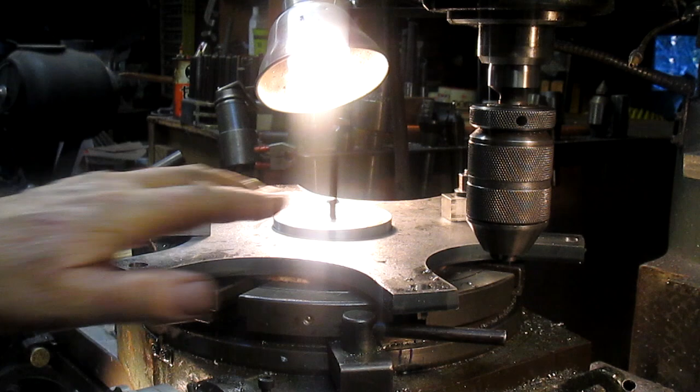Okay, the next set of holes are two holes here and here, and threaded 12-24.

Okay, so what we have here is we're going every 60 degrees, and I've already marked my 60 degree point, and that is this little white dot right there. You can kind of see it. So we're going 3 degrees either side of that dot, there's 1, 2, 3. Now what we're going to do is come back to the other side of the dot, 1, 2, 3. And then we take the dial here, and you can kind of just see it, and bring it up to 1 minute, and then lock it in place, and it's ready to rip.

Let's swing up. There you go.

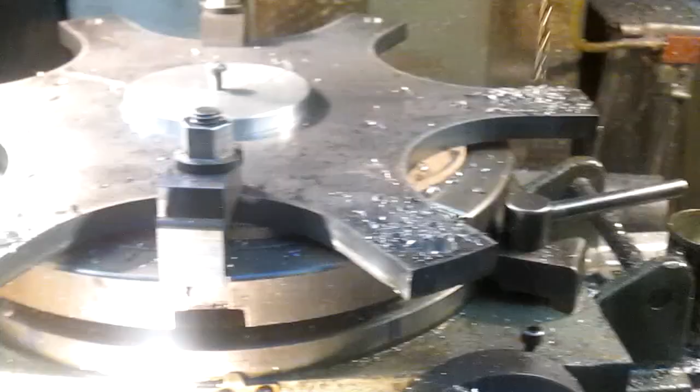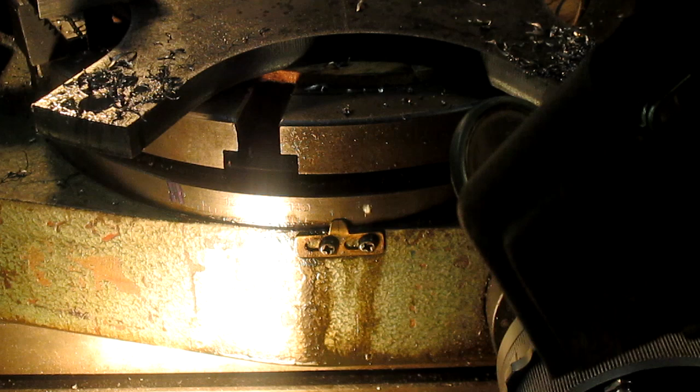All right, we're going to rotate around to the next 60 degree point. And there it is coming up. And we're going to do 3 degrees. There's 4, there's 3. And then we bring our number up to a minute.

All right, so we've done our 360 degrees, and we need to take our drill bit out, and this whole thing needs to be tapped. And we're looking at a 1224, I believe. 1224.

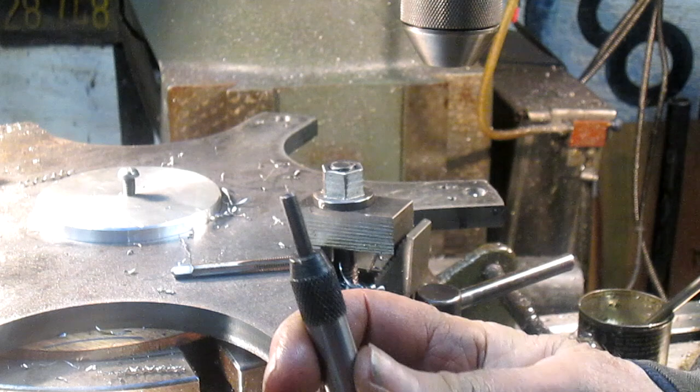So first thing we do is put our tap follower in. And this is, I just learned this just a couple of days ago. I've had this tap follower for probably 15 years, and I never even considered that you could take it apart. Oh yeah, you take the screw out of the back, and this thing flips around and it has a negative in it for these kinds of taps. And you've seen these taps before. They always frustrated the hell out of me. But then I realized, hey, it fits and it works.

So to put our tap follower in, come on. There we go. Tighten that up.

And we need to take this down. Maybe about that far. Okay, a little further. Just a tad more. There we go. And get our wrench.

Now the key is, the most important part is that these taps go down evenly and centered. And so we take the extra time because I don't want it screwing up. And we're just taking it down about halfway because I'm going to come in with a drill and this tap and speed drill the rest of the way.

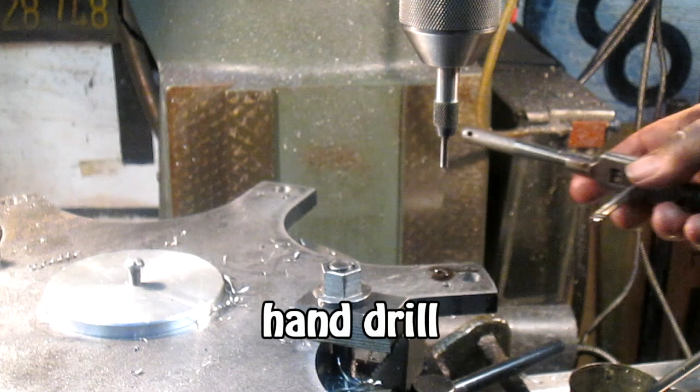So let's back up a little bit. Somewhere in that general area. Where are we at? 4, 3.

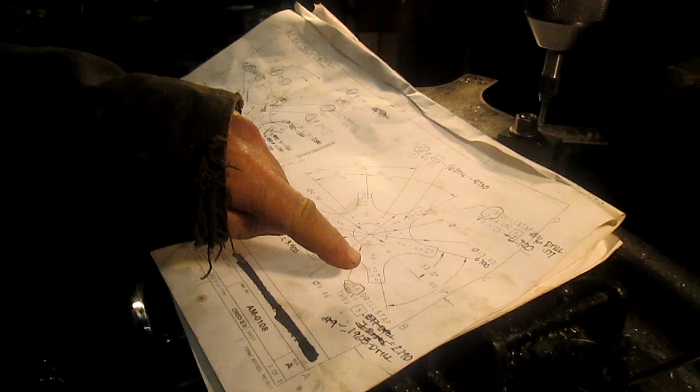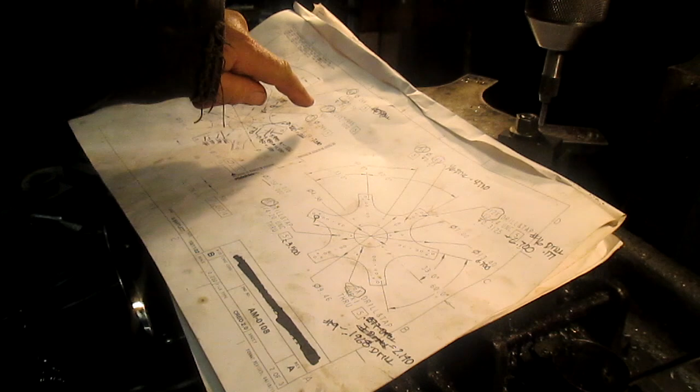Okay, on to the next hole, which is, there's 4 of them in here in line, actually 5 with the little 16th inch hole, but we won't do that right now. We're just going to do these 4, and 2 of them are drilled at 266 plus or minus, and 2 of them are drilled at 250 minus 0 plus 5.

So we've got a bit of leeway. I'm gonna, on the 250, come in with a reamer and just ream the hole, and that way we know we're exactly 250.

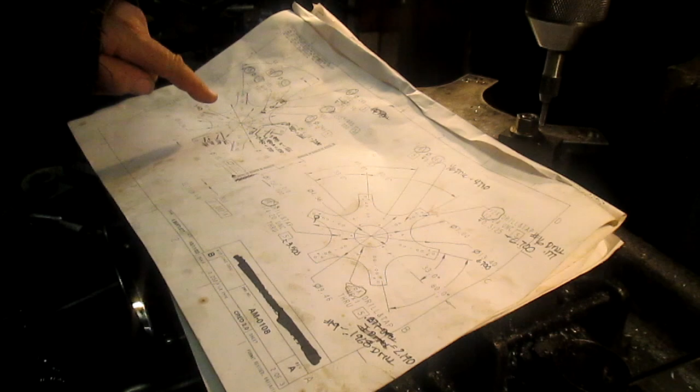So our other size is, where's it at? Oh, here we are. And I marked, when I did the first one, I just came in and wrote down all of the dimensions, so I don't have to mess with that. So our first dimension is 5995 at 266.

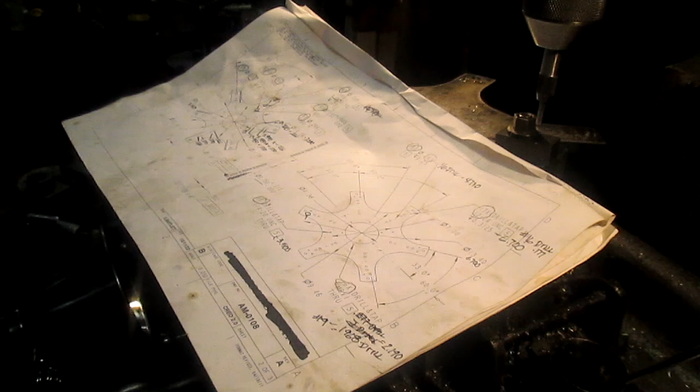5995. Let's go ahead and get that going. 599. Five.

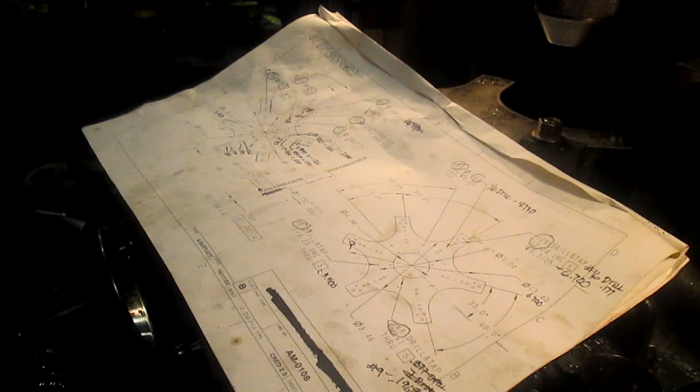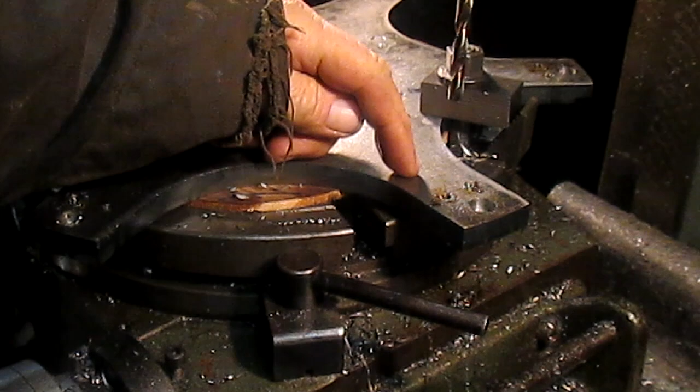Let's bring in a little closer. Now, we are sitting 33 degrees off, so we want to come back to that center line, which is right here, I believe. Snug things down. And I think we're ready to rip.

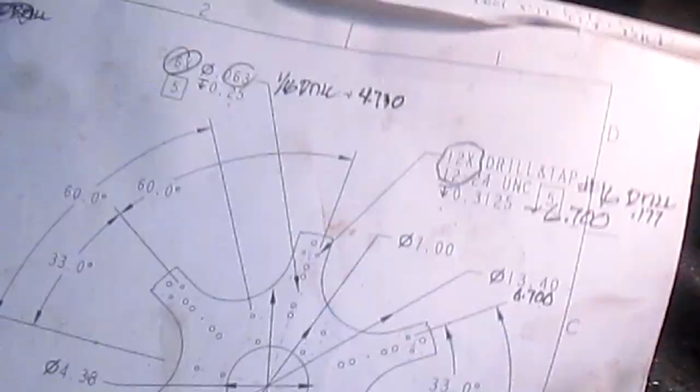Okay, that's that for that. Now what we're going to do is go all the way to the bottom, because that hole is also a 266. And let's figure out what the measurement is. On the bottom measurement is 266 and 3465. So we're going to go to 3465.

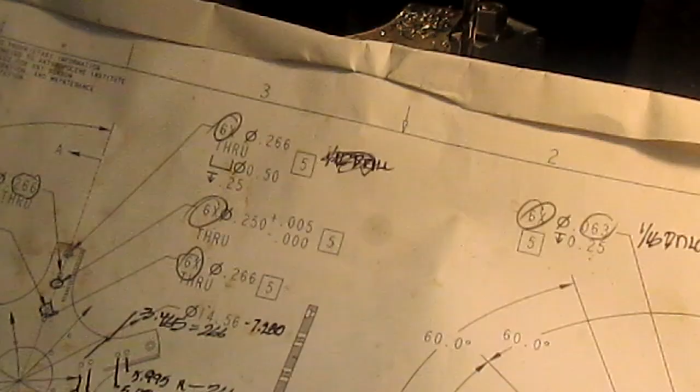And check it one more time. Our bottom hole, 3465 at 266. Let's do it again.

Okay, we got those two holes drilled. Now we need to drill the two center holes, which are going to be reamed. So we're going to go a few thousandths under 250.

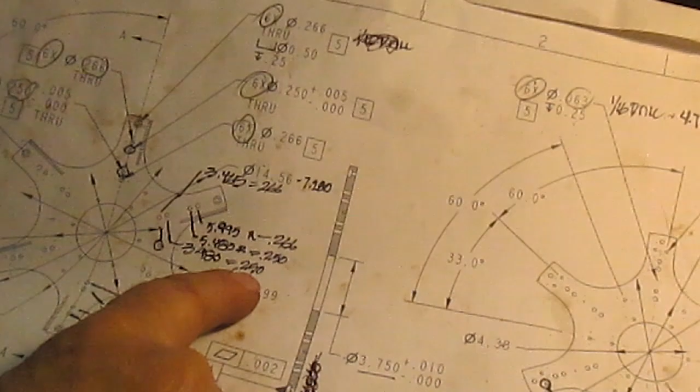Okay. And our diameter, we look at it. The two center holes are 250 and 250, so we'll go to the 3980. 3980.

All right, well our next measurement is 5480 at 250. So same deal. Okay, this is the fun one.

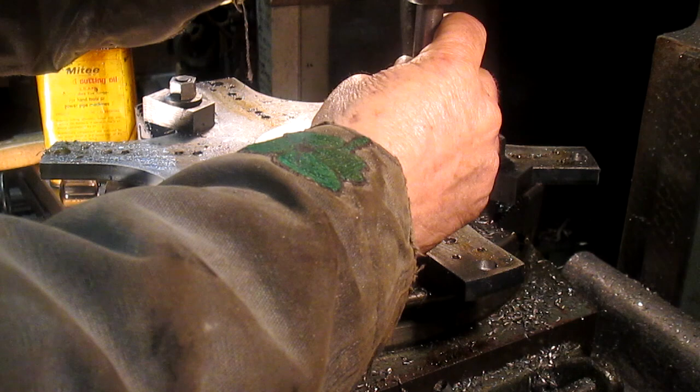We have a 16th inch hole to drill right in the center there, and my chuck won't handle it. In fact, none of my chucks will handle it. So I had to come up with a little jeweler's chuck, and then I had to turn it down so that it would fit. And then it was a little off, but it looks pretty straight right there, so I think we're going to go with that.

All right. That's the end of that.

Now we come to the center and do 2 holes in the center. One is going to be for a 1/4 inch thread, and the other is going to be for a metric thread. Go figure.

So what we're going to do is come back to 0, and that puts us right in the center here, which is where we want to be to drill.

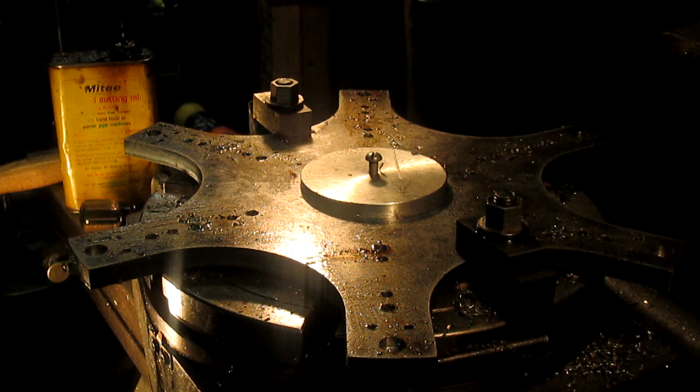Two 190. There's our drill bit. Let's bring it up a bit, and that should get us started. 2190. Yes, yes, we're set to go.

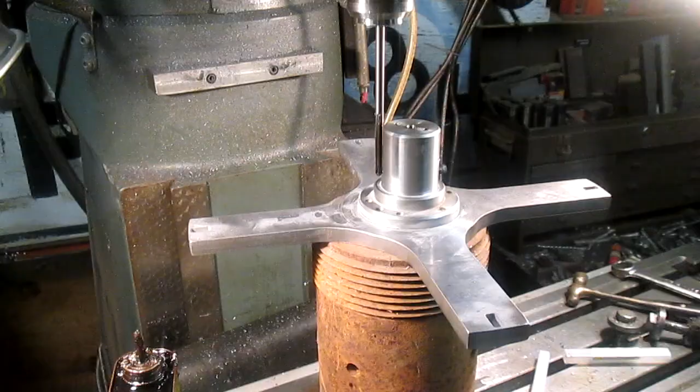Well, I know it seems out of sequence to be back to working on this, but I couldn't actually ream these little pilot holes until this moment when everything else is done, and then I come back and ream the pilot holes. So we crank up the mill and we just start punching through.

All right, well that was simple enough. Now we come in with a couple of dowel pins and a little hammer.

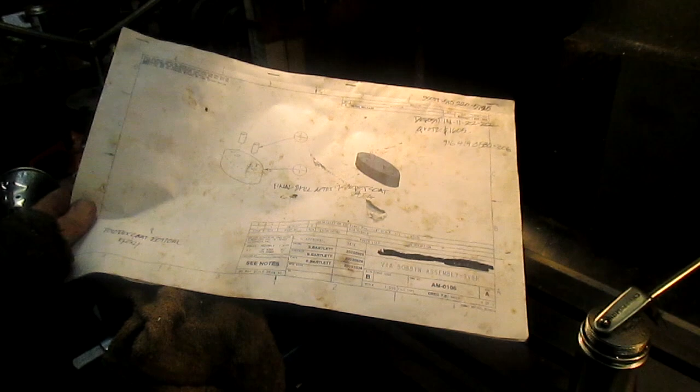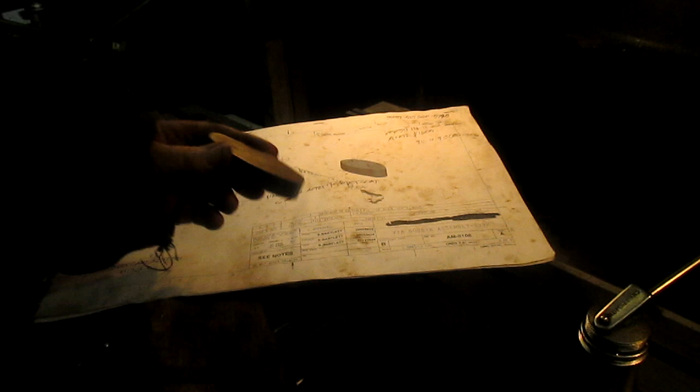Okay, so we've got our final project, or part of the project, in this whole process, and this is called the bobbin assembly, and who knows what that is, but it is this little, hang on, let me get one for you. This little 1/2-inch piece of steel that we're going to drill 4 holes into, and also round off just that one top corner.

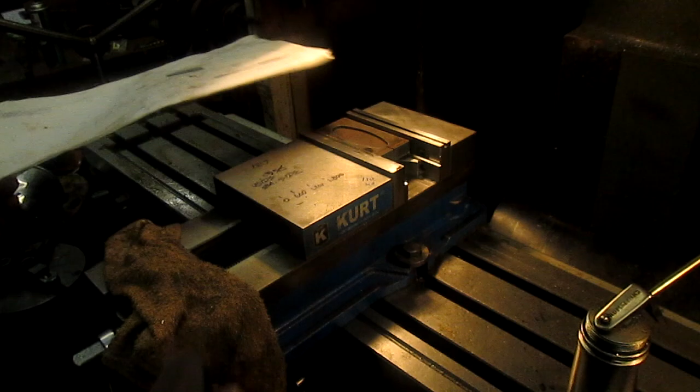You know, how do you chuck up something like that accurately when it can roll back and forth? So what I did is, when I had these cut out, I had a negative cut out that was a little bit smaller. It cost me a couple bucks, like $25 to have it done, and it was like, oh, this is perfect.

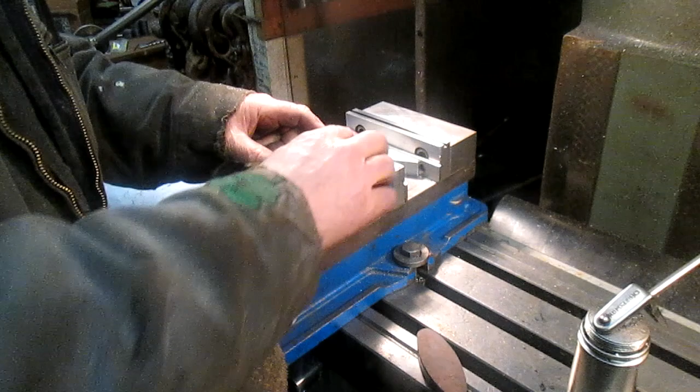So when he cut it out on the laser cutter, it was just a little bit sloppy. You can see that right there. So I decided, okay, let's just split it and drop it in the vise and close the vise up, and that thing doesn't move a bit.

Now the other problem was that we had, this was equal angles or equal parallels, and so how was I going to get this to clamp? So I just came in and threw just a little bit of a weld on each side of this so that it would clamp in.

And then we bring this to that edge right there, drop that in place, and close it up. Maybe a bit of a problem there. But nothing we can't handle. That's good, right there. Tight as a drum.

So now we need to lay this out so that our holes are in the center, and then we drill our 4 holes, and then we send them to the powder coater, and he powder coats them, and then we come back, and I'm not sure, do these get threaded? Yep. So they get threaded 1/4 inch, and this is a 250 thousandths.

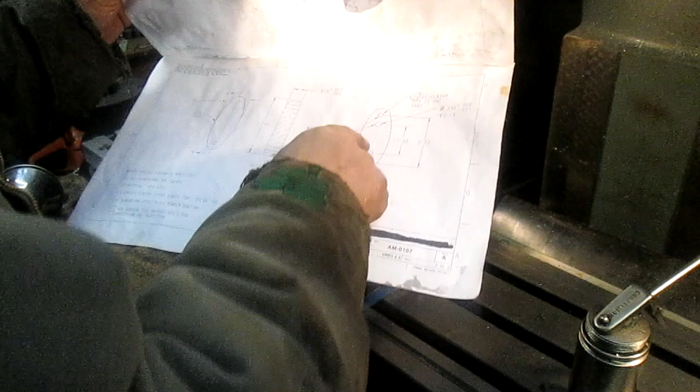Oh, minus 1. Oh, interesting, minus 1? I don't get that. Oh, maybe it's a slip fit here and a tight fit on the other part. Okay, well, that's what he wants, that's what he gets.